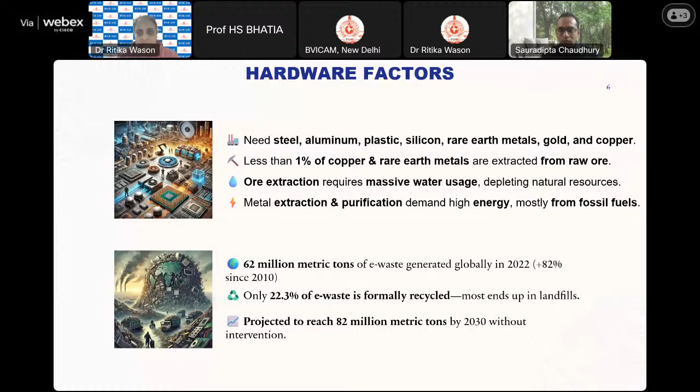Now talking about the software and people factors, we just looked at the hardware factors. What about the software? In Google Play Store today, there are around 2.4 million apps available to download. Similarly, in the Apple App Store, there are 1.83 million apps available. There are over 1.1 billion websites that exist on the internet as of September 2024.

And these are only the numbers of applications which have been tried and tested and are successfully consumed by end users. Behind every successful application that is rolled out, there might be 10 to 15 failed applications. Just imagine the amount of coding that IT professionals are doing these days. You can look at the numbers here.

It's 55.3 million IT professionals worldwide as counted in 2020. All these professionals are using some device or the other to write their code, to execute their code, to test their code, and every activity required to develop. And using those devices at the end of the day needs power.

So 55.3 million IT professionals using these many devices, building these many apps, we are consuming energy. And most of that energy comes from fossil fuels. 80% of the global electricity required to run IT infrastructure and consume IT gadgets comes from fossil fuels, which means very little amount of energy is sourced from renewable sources.

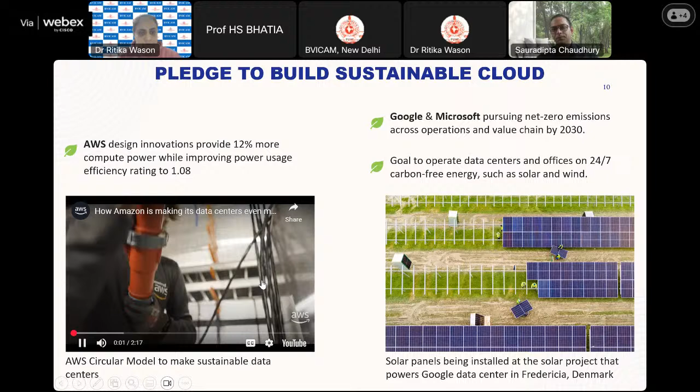AWS is building a more sustainable business because that is what our customers want. One of the ways we are driving sustainability at our data centers is by expanding our circular economy efforts. I'm Manju Murugesan, and I work on the sustainability team here at AWS. Our strategy for accelerating our transition towards circularity is based on three pillars: design better, operate longer, and recover more. By designing better, we unlock more potential than at any other stage of circularity. We design to avoid waste by eliminating excess materials, enabling more reuse and recycling, and using materials that are safer for people and the environment. Next, we plan to operate longer through robust maintenance of data center hardware to avoid early retirement. At AWS, we consolidate individual functional hard drives from multiple aging racks into fewer, fully functional racks, extending the lifespan of S3 hard drives by up to 2 years.

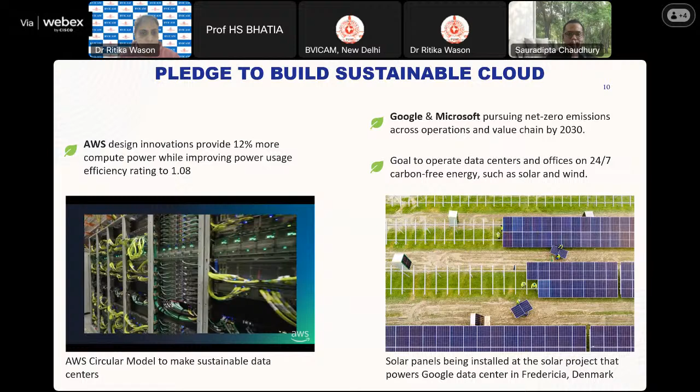By sending only broken drives for recycling and avoiding the early retirement of healthy working drives on the same rack, we increase water and energy efficiency.

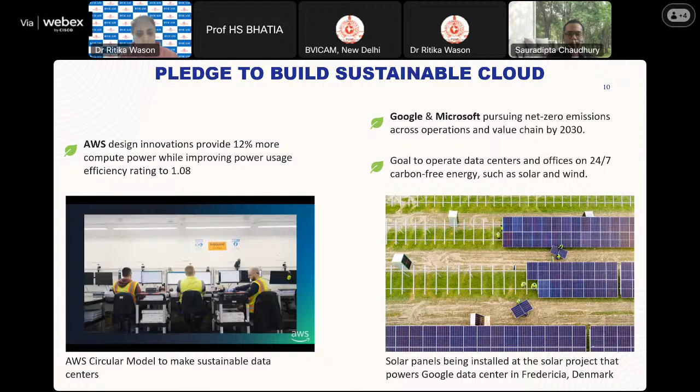Finally, we aim to recover more through repair and reuse of used equipment, avoiding the carbon and costs associated with purchasing and manufacturing new components and materials. AWS sends securely decommissioned equipment to our regional reverse logistics hubs to assess, repair, and recirculate functional equipment back into inventory or to be sold for reuse by third parties.

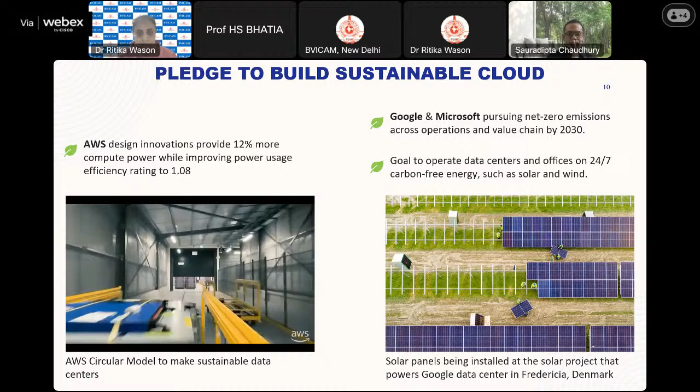By designing better, operating longer, and recovering more, we will continue to expand on our circular economy efforts. Our acceleration towards circularity means we use today's equipment to build tomorrow's, charting a path for AWS, our customers, and the global supply chain to reach new levels of resource efficiency and to build a more resilient future for the planet.

So if you have been able to listen to this video well, then you would see that the principles of making a sustainable data center are pretty simple, right? First, what they said was we need to design better.

Designing better means they need to select the right kind of materials, the right kind of layout for placing their servers, etc., such that the energy requirement is less. A simple example: if you have a very long wire connecting to your device compared to a short wire, the amount of time the electricity has to travel decides the amount of heat dissipation.

But if you can optimize the length of the wiring in your data center, some way you can save on that kind of heat generation. So that was about designing better. That's one aspect. Then, use advanced materials which are efficient in themselves, which have the ability, with very little amount of material, to perform more.

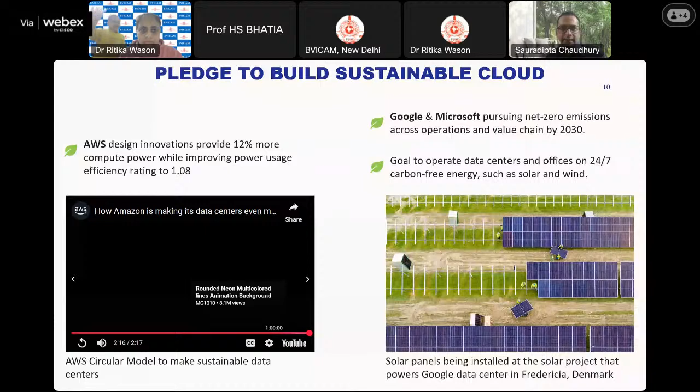That's how AWS is built. Next, another innovation that Microsoft has brought in, and I think other data centers are also looking at it: they are now using liquid immersion cooling at Microsoft. As I said, data centers generate a lot of heat and they need an immense amount of water to cool themselves down. The servers need to be cooled down to maintain their performance levels. Instead of water, they are using a different kind of liquid, which they call low boil dielectric fluid. That is a kind of fluid which enables recapturing and reuse of the heat.

When you use that fluid to cool down the thermal energy that is getting generated, the thermal energy gets converted into vapor easily. You can capture that vapor because the vapor is at lower temperatures, since it's a low boil liquid. You can capture that vapor and then use it to run some other applications. Instead of just sending it out into the environment, you're reusing the thermal heat generated from the servers for some other purpose, right?

This also allows them to stack more processors in fewer racks. Now my cooling power has been enhanced, which means I can generate more and more heat within a small space and still cool it down. That means the size of the data centers is getting reduced, and with a reduced size, you would eventually need less power to run. So that's a two-way benefit they are getting using the low boil dielectric fluid, and they claim that they are close to 98% energy efficient already.

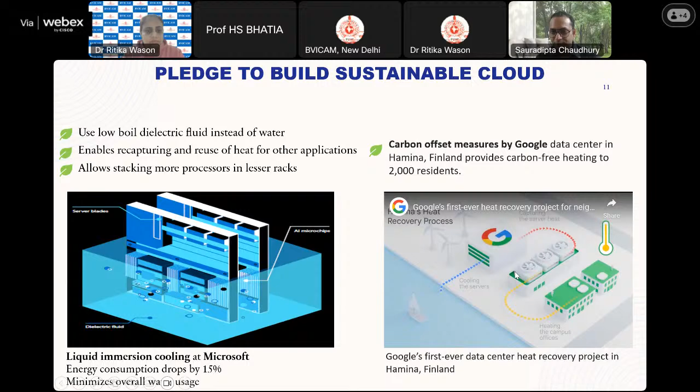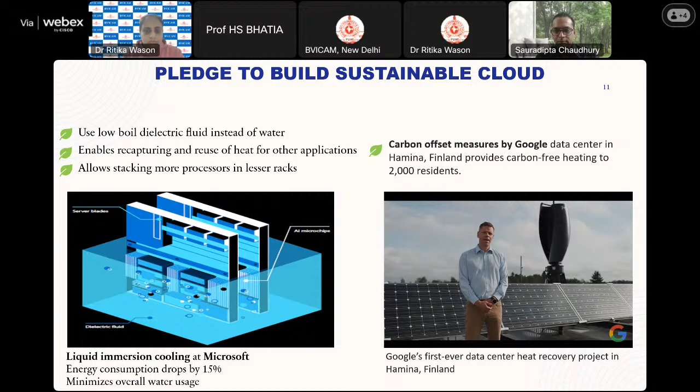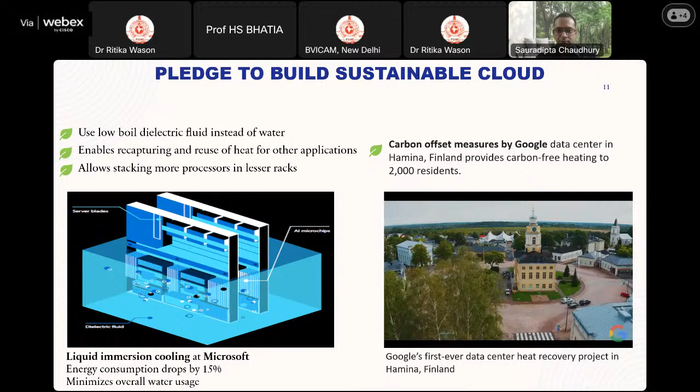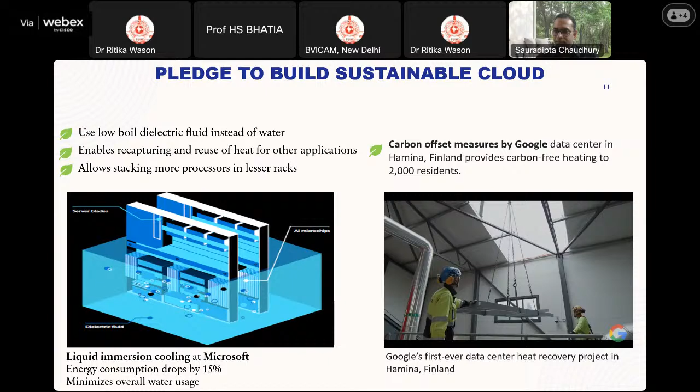We've long wanted to channel our recovered heat off-site to be used by the local communities. After years of extensive work, we are finally able to put our dream into reality right here in Hamina. Finding the right off-taker is crucial. That's why we're delighted to partner with Hamina Energia to share our recovered heat with the local heating network. Back in 2006, Hamina Energy made the first investment in wind power production. In 2018, we developed further when we invested in this district heating factory. We were able to cut down the emissions, and also cut down pricing for our customers as well.

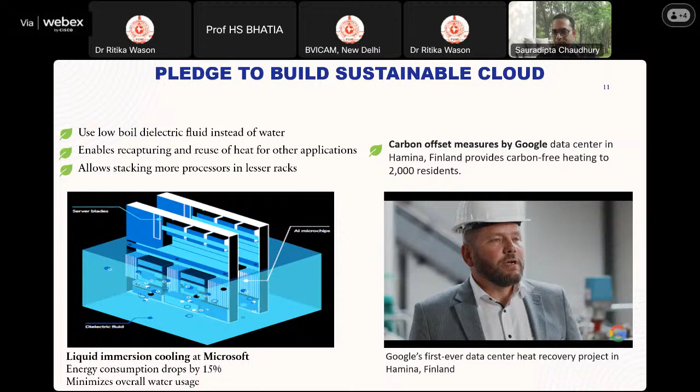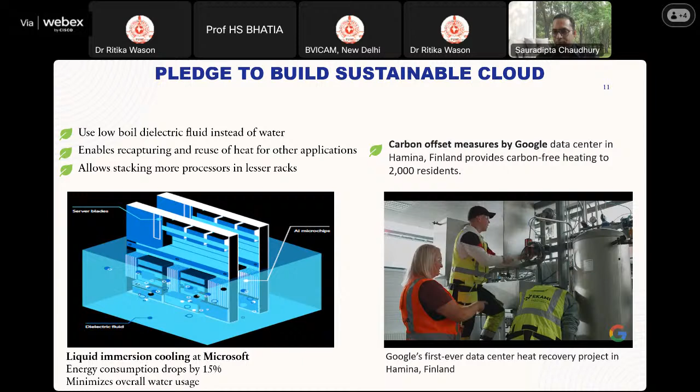This new cooperation with Google would ensure even more affordable and sustainable heat for the customers in the Hamina Energy district heating network. For Ekami, education and sustainability go hand in hand. They help future generations thrive. Google's bold work in Hamina doesn't just warm our bodies, but our hearts as well.

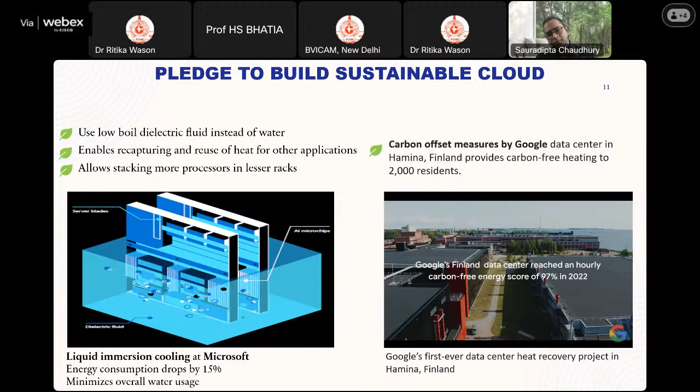Hamina is only the start. Heat recovery is a major opportunity for energy conservation and transition, and Google is working to make it a reality in our data centers worldwide.

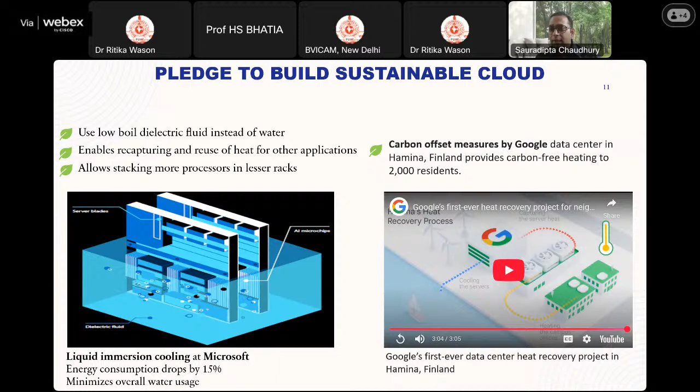Pretty awesome, isn't it? So this was one of the first ever initiatives wherein, if you think about it, data centers are constantly generating thermal energy, and they have redirected the thermal energy to the heating grid. Heating grid means in the cold countries, there's a huge need for heating, keeping their houses warm, right? So if data centers are a source of thermal energy, then why can't they use their thermal energy to heat the houses in the neighborhood?

So quite an innovative idea, and it's exactly innovations like these which would be required to keep the cloud sustainable, to keep this IT sustainable. It needs investment. They are investing. So the money that they are charging from their consumers, a part of it, they're heavily investing to meet the overall climatic goals that they have set.

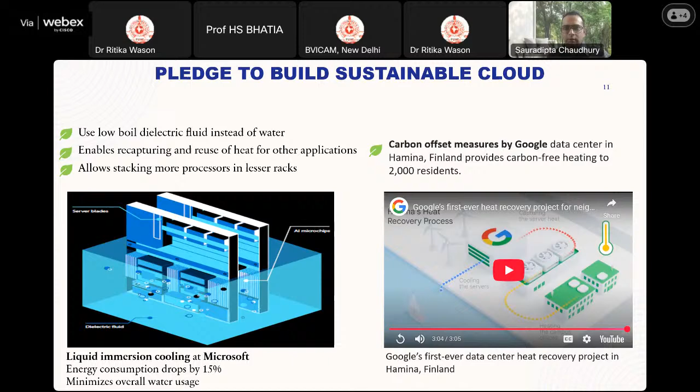So moving out from the cloud leaders, now let's look at what people like us, the architects, the developers, the people component that we were talking about, can do to build something called a green application, or what we call green coding, right? So there's this organization, Green Software Foundation. It's a free, open source organization which has come up with principles, and it is just one of them. There are other organizations which are doing it also. Within Nagarro also we are doing it. So we are coming up with green principles, right?

So the green principles meaning, if I have to design a data pipeline, this is the kind of solution that you need to do. This is a sustainable solution. There are certain principles and there are certain software patterns, right? We have been talking about coding patterns, design patterns, SOLID principles. Those were all related to building well-structured code, well-performing code. Now we are talking about patterns by following which we can eventually end up building green solutions, green applications. And these patterns will have to be used on top of the various kinds of services that the cloud providers provide, or for that matter, the on-prem solutions, right?

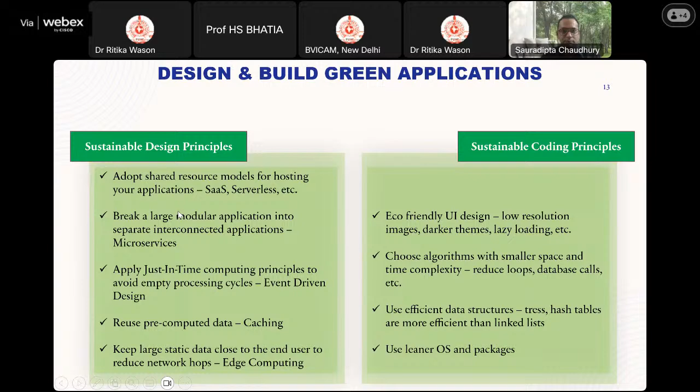After you have built all the applications, obviously you need to measure, right? It's very important; Europe especially is very strong in this regard. The US is also catching up, Asia is also catching up. But if you cannot measure something, you cannot improve it, right? So you have to measure the carbon footprint that your solutions are generating.

Let's say I am an organization with 500 applications running, and I am a customer of Microsoft Azure Cloud. Microsoft Azure, and similarly AWS and Google, all provide you with an emissions dashboard. They have reporting tools which tell you: this is your organization, you have these many servers running as part of your subscription, and this is the amount of carbon emissions you are producing.

And total usage, etc. So this is the amount of carbon your devices are generating, this is where most of your servers are, and this is where it's happening. It gives you a very clean dashboard of where you stand in terms of your carbon footprint. Are you meeting your goals? If there is a deviation, you get to know through this dashboard, and you do the necessary tweaks in your solution.

This entire part is called green ops, or green operations. Once your application has been put into production and consumers are using it, you need to monitor its operations, right? So you bring in automation. If you see that some server is consuming more and more energy, you think about options like, do I need this server to be kept on for the night period?

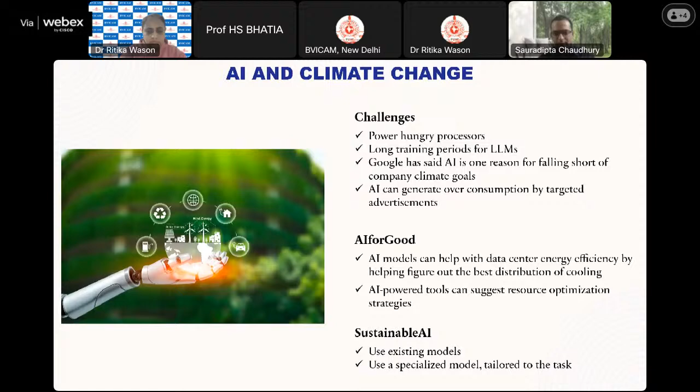You would be unnecessarily using a very heavy model to just get information for the medicines that you are using. Instead, if you can train a much smaller model which just contains pharma related terminologies, then that model would be very lean. That model would be much less energy intensive, it can be easily deployed, and the running costs from the energy standpoint for that kind of a model would be low. So we need to be sustainable when opting for an AI solution for my problem. I need to understand what is the most sustainable AI solution that will suit my purpose. That is what sustainable AI is all about.

Now, the next concept is about conscious digital consumers, the end users. We are building software and applications, but it is the end users who are using them, and they also have a very big role to play. Optimize device usage. Check the ratings before purchasing. Buy devices which are economically rated good. Switch to low resolution content. Do not unnecessarily switch to 4K or high definition video if you don't need it. Most of the time we don't need it. If we are just looking for some information, it's not required to switch to 4K mode to look at that video. I can switch to lower resolution content and still get my information.

Shut down when not in use. If you're not using your laptops, please switch them off. Otherwise, you're unnecessarily wasting energy. Use Wi-Fi instead of mobile data. If you are at your home or in your office, there's some Wi-Fi connectivity available. Wi-Fi is less energy intensive compared to mobile data. Mobile data runs out your battery more compared to Wi-Fi, and then your battery needs to be charged. Your devices also get heated up more with mobile data. So use Wi-Fi instead of mobile data.

Again, buy refurbished or repair whenever possible. Amazon was using it in their data centers. The same philosophy you can also apply in your daily life. Use your devices with care, maintain them well, increase the longevity of the devices so that you don't add to the e-waste problem unnecessarily.